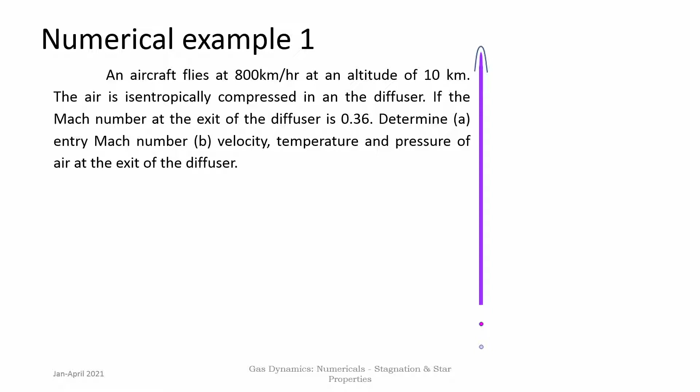The first example here is an aircraft flies at 800 kilometer per hour at an altitude of 10 kilometers. The air is isentropically compressed in a diffuser. If the Mach number at the exit of the diffuser is 0.36, determine the entry Mach number, velocity, temperature and pressure of the air at the exit of the diffuser.

So, see, this is an example with an engineering device known as the diffuser. So, a diffuser is any device which reduces velocity, and the consequence of that is that pressure and temperature increase, and this we have seen even in our discussions in the isentropic relations, that when it is decelerated, pressure and temperature will increase. So these are present in many devices, and this is a typical example.

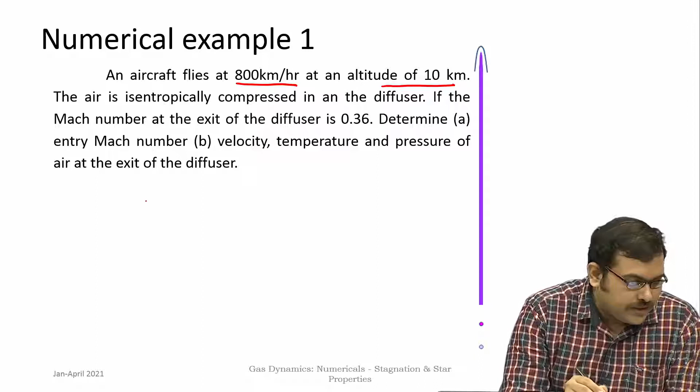So, here the way to begin is you are given the altitude. So, again some concepts that become important here: the flight velocity and altitude are given. So, static conditions and stagnation conditions, the distinction between them. Once you know the altitude, you can reference a standard atmosphere and get the pressure at those altitudes. So, the pressure P infinity is 0.264 bar, and temperature, T infinity, is 223.15 Kelvin. This we can easily find out by using a reference atmosphere.

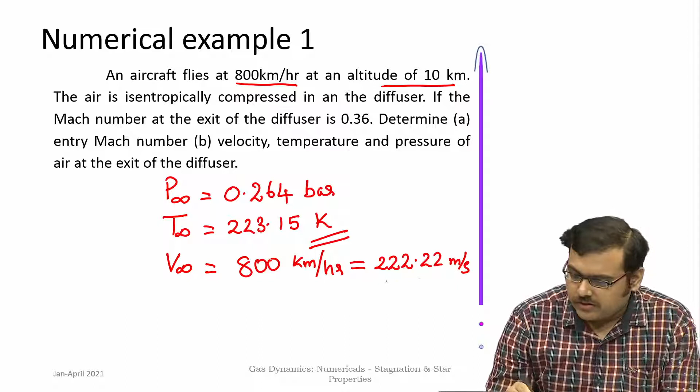Then we are given the velocity of the aircraft. So, aircraft velocity is given, that is V infinity. This is given as 800 kilometer per hour. This can be converted to meter per second, the SI units which are normally used, and this turns out to be 222 meter per second. So one should notice here that the temperature is quite low, and the velocity is significant, so you can expect compressible effects here.

So first thing to do here, as we know in our relations of stagnation conditions and static conditions, everything is dependent on gamma and Mach number. This is air, so gamma is 1.4. So the way to do this is to connect the given quantities to the stagnation quantities, and then from there come to the exit of the diffuser. Since the flow is isentropic, the stagnation pressure and stagnation temperature do not change within the flow. So once this is understood, it is easy to go ahead with the solution of this problem.

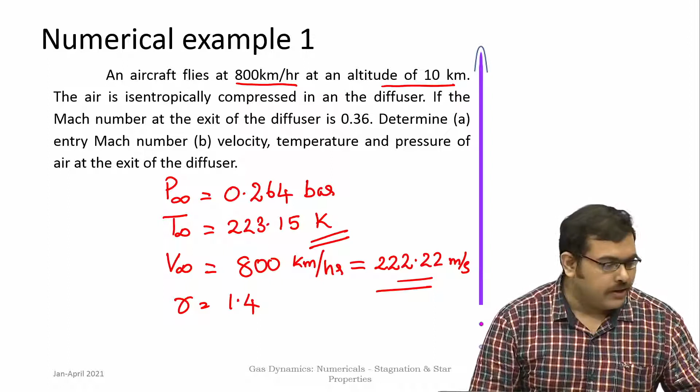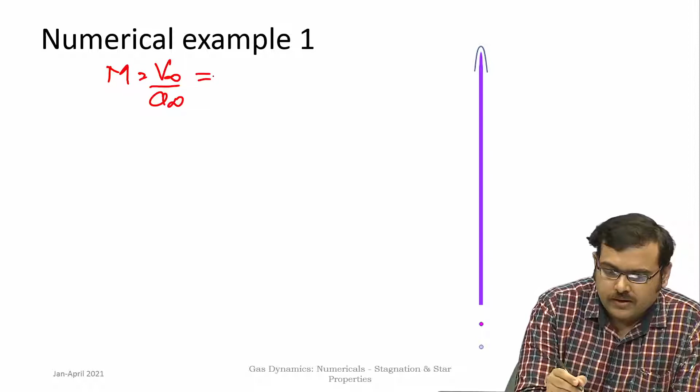So first point is we have to get the Mach number for this flow. So Mach number is V infinity by A infinity, that is the Mach number of the flight. This is 222 divided by square root of gamma RT, with R as 287, and temperature is the static temperature at that condition, so it is 223.15. And this Mach number, if you do the calculation, will come out to be 0.742. So this is known.

Now we have to get the relation for P naught 1 and T naught 1. The idea is at the exit of the diffuser. So the diffuser, for this is a subsonic flow. So you have a diffuser something of this kind, so this is the entry where it is coming in, and conditions are known here.

Mach number is 0.742, P1 and T1 are known, and P2 and T2 should be found when M2 is known to be 0.36. So this is known to you. The flow is isentropic, so P01 and T01 remain constant. So we have to find what is P01 and T01.

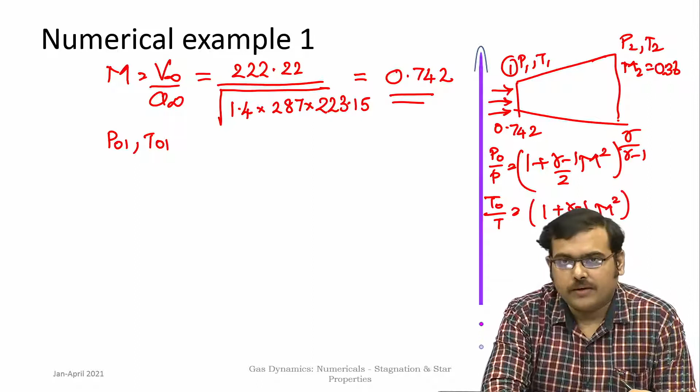This is quite simple, so you can do it over a calculator, or you have tables and charts for this which can be used, or you can also use an online calculator where you can feed in the gamma and Mach number, and usually the results will be in terms of P by P naught and T by T naught for a given gamma and Mach number. So this can be easily found out by various means.

You are free to choose the means, and what you can do then is get P by P naught for this given Mach number. In this case for 0.742, P by P naught turns out to be 0.695. So P naught will be P divided by this value 0.695, and P is already given as 0.264. So this is 0.264 divided by 0.695, which is 0.38 bar.

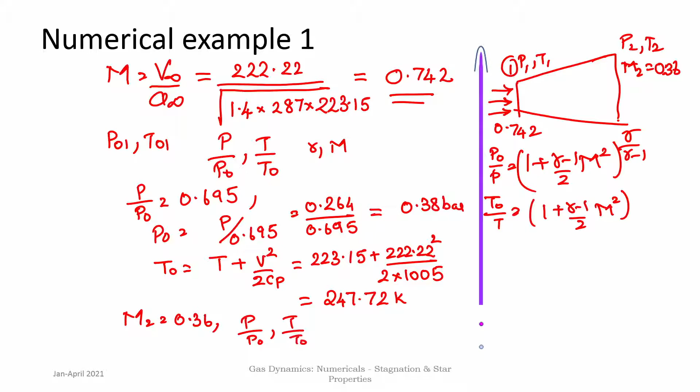So now you know P naught and T naught. Getting to the exit is straightforward. These quantities remain the same. Now the Mach number has changed to M2 equal to 0.36. For this value of M2 one has to find out P by P naught and T by T naught, and then you can multiply. So for M2 equal to 0.36, P by P naught is 0.914, and so P2 is P naught, 0.38, multiplied by 0.914, equal to 0.347 bar.

Similarly, T by T naught is 0.975. So T2 you can get by multiplying by 247.72. This will be 241.53 Kelvin. Now what we need to do is find the velocity, that is V2. We are given Mach number M2, so we can get velocity V2 as M2 multiplied by A2, the speed of sound at that particular point. Speed of sound is a local variable, so you have to calculate the speed of sound at 2.

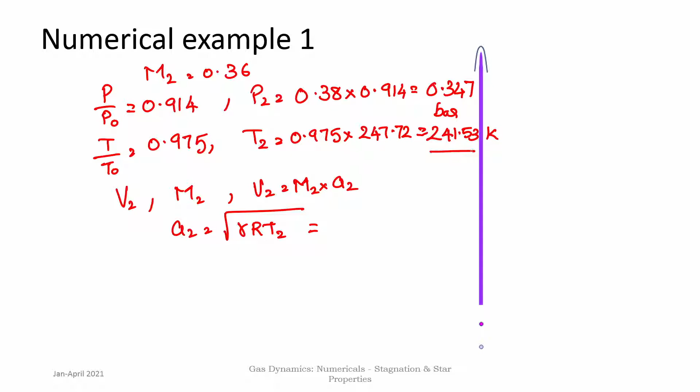This is different from what it was at 1, and A2 is square root of gamma R T2, and T2 you have found out in the previous step, so you can substitute that here, 287 into 241.53, and multiply this by Mach number. So this turns out to be 311.52, and V2 is just 0.36 multiplied by this value, and you get V2 as 112.146 meter per second.

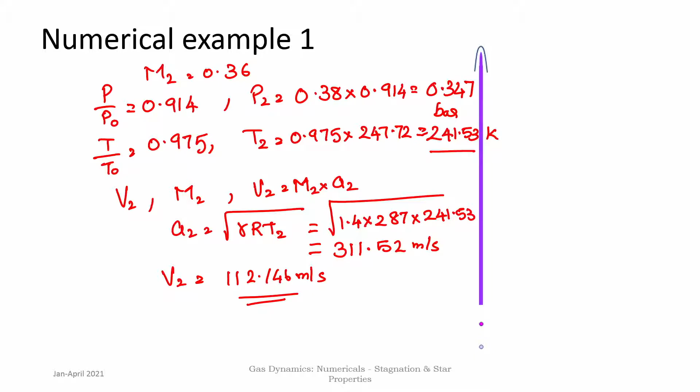So this example showed you how the concepts of stagnation pressure and stagnation temperature can be used to quickly estimate flow properties at different points in the flow path. In this case it was a diffuser with isentropic flow through it. For a first estimate, this is a very good way to calculate these flow properties. Now let us go to the second example.

In the second numerical example, air at 400 Kelvin exits a duct as a jet at sonic velocity. So the temperature of airflow is 400 Kelvin and it is at sonic conditions. At the exit of the duct, Mach number is equal to 1. Gamma and R are given, 1.4 and 287. Now determine velocity of sound at 400 Kelvin, velocity of sound at stagnation conditions, maximum velocity of jet possible, and stagnation enthalpy.

So here the velocity of sound at 400 Kelvin is the same as the velocity of the jet, because you have it at critical conditions, that is V star is equal to A star, at sonic speed. So velocity of sound at the exit is square root of gamma R TE, which is 1.4 into 287 multiplied by the temperature 400 Kelvin, and this turns out to be 400.89 meter per second.

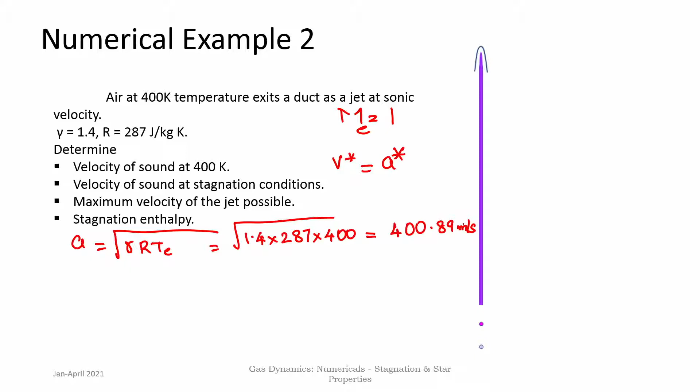Now next is what is the speed of sound at stagnation conditions. Since T naught, the stagnation temperature, is an important parameter, you can calculate the velocity of sound at stagnation temperature, that is the stagnation velocity of sound. From here you can go by various methods; all are equivalent.

One is to use the charts: for this the Mach number is 1, and the relationship between P by P naught and T by T naught at Mach number equal to 1 is known, and then you can find out what is T naught, and from there get A naught.

But another straightforward method is directly using the alternate form of the energy equation, which is A square by gamma minus 1 plus V square by 2 is equal to A naught square by gamma minus 1. Here for stagnation conditions the velocity is 0. So here both V and A are known because they are the same.

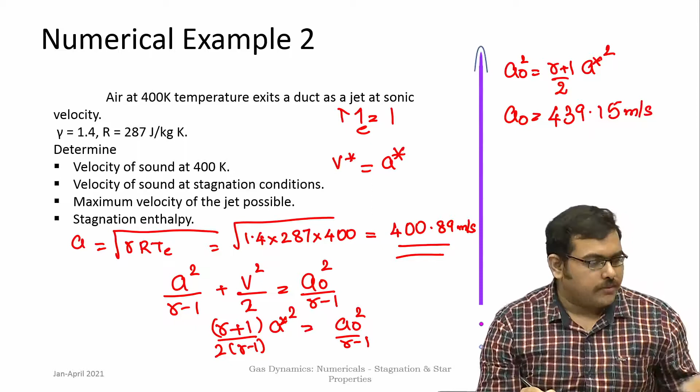So this turns out to be A star square by 2 plus A star square by gamma minus 1 is equal to A naught square by gamma minus 1, or from this you can write immediately that A naught square is gamma plus 1 by 2 A star square. This gives you directly A naught, because A star is already known. So A naught turns out to be 439.15 meters per second.

Then the next question is, what is the maximum velocity of the jet possible? Here also we can use the energy equation. If you look at the energy equation for an adiabatic flow, h1 plus V1 square by 2 equals h2 plus V2 square by 2, you can see that any change in velocity involves interaction between the enthalpy and kinetic energy. So it is a balance between the enthalpy and kinetic energy.

What is the maximum velocity that is possible? The answer is simply that if all the enthalpy gets converted only to kinetic energy, then that yields the maximum velocity that can be extracted from the flow, that is V max. That is the concept here.

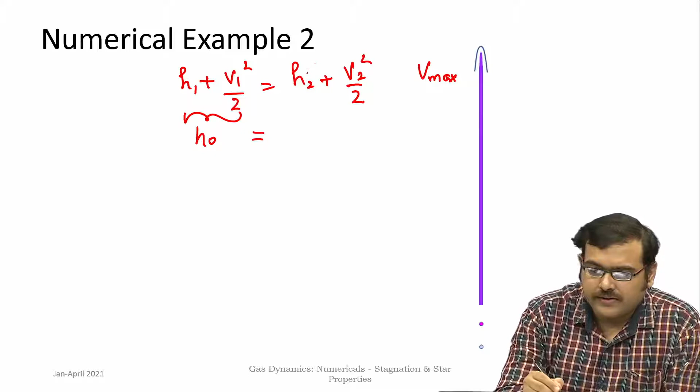It's the other way around: if you take the flow to 0 velocity, then all kinetic energy gets converted to flow enthalpy. So that is the stagnation enthalpy. So this is stagnation enthalpy H naught, and in the second case the enthalpy goes to 0, so this goes to V max square by 2. This is the maximum enthalpy that can be taken in.

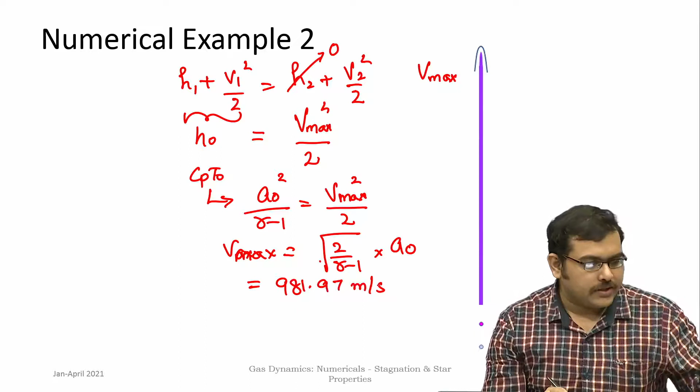Since H naught can be expressed as Cp T naught, it can be expressed as A naught square by gamma minus 1 equals V max square by 2, and A naught is already determined in the previous calculation. So V max is square root of 2 by gamma minus 1 multiplied by A naught, and this turns out to be 981.97 meters per second. So this is the concept of maximum velocity.

Finally we have to determine the stagnation enthalpy, H naught. It is Cp T plus V square by 2. Here temperature is T star, velocity is A star. This is already known and calculated.

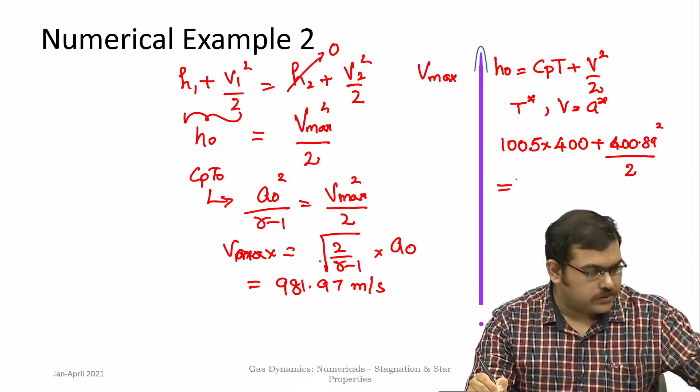So this comes out to be 1005 multiplied by 400 Kelvin, plus V star, which is 400.89, squared by 2, and this results in 482.35 kilojoules per kg. So we have determined the various quantities.

So a new concept that came about in this numerical is that of maximum velocity through an isentropic process, and this is determined when all the total enthalpy gets converted only to kinetic energy.

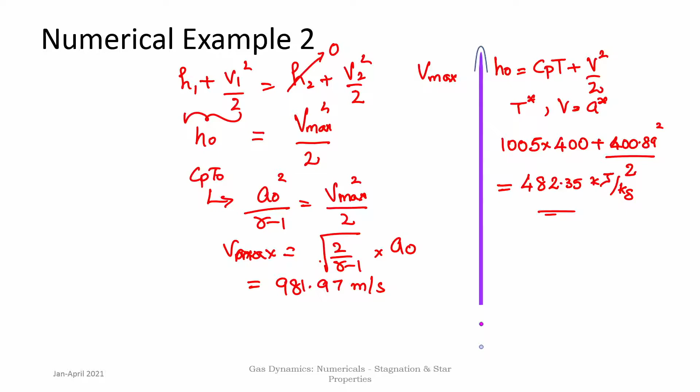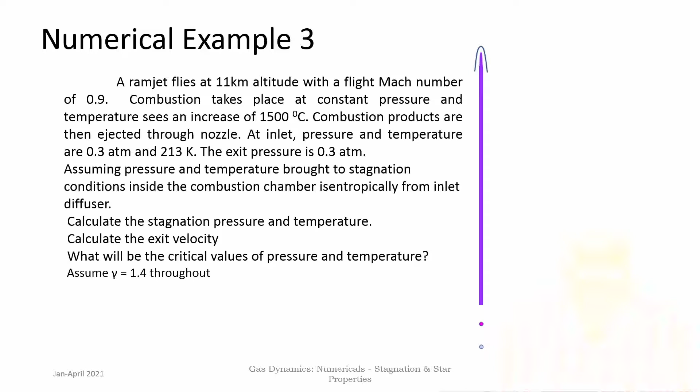Another example, for a particular device, is example 3. A ramjet flies at 11 kilometer altitude with a flight Mach number of 0.9. Combustion takes place at constant pressure and temperature sees an increase of 1500 degrees centigrade. So temperature increases by 1500 degrees centigrade, but during combustion pressure remains constant. Combustion products are then ejected through the nozzle at inlet pressure and temperature.

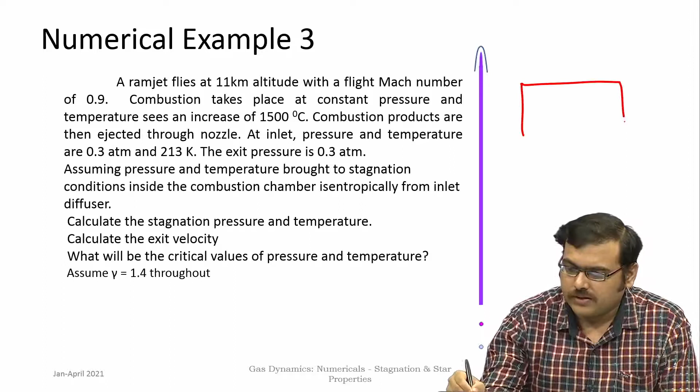...are 0.3 atmospheres and 213 Kelvin. So, inlet pressure and temperature is given, exit pressure is 0.3 atmospheres, that is also given. So, let us take it as a box, and what is given at the inlet: pressure is given 0.3 atmospheres, and temperature is given 213 Kelvin, and at the outlet, this is 1, 2, at the outlet you are given exit pressure is 0.3 atmospheres, and here you are given pressure is constant,

while temperature increases by 1500 degree centigrade, it is the same as Kelvin. So, 1500 Kelvin. Calculate stagnation pressure and temperature, calculate the exit velocity, what will be the critical values of pressure and temperature. So, here assumption is that pressure and temperature are brought to stagnation conditions inside the combustion chamber isentropically from the diffuser. So, the diffuser, again it is an isentropic diffuser, flight Mach number is given 0.9, and it is converting it isentropically to the combustion chamber conditions, and there pressure is constant.

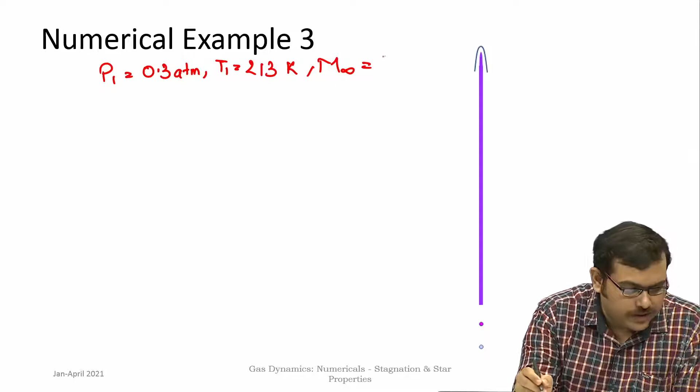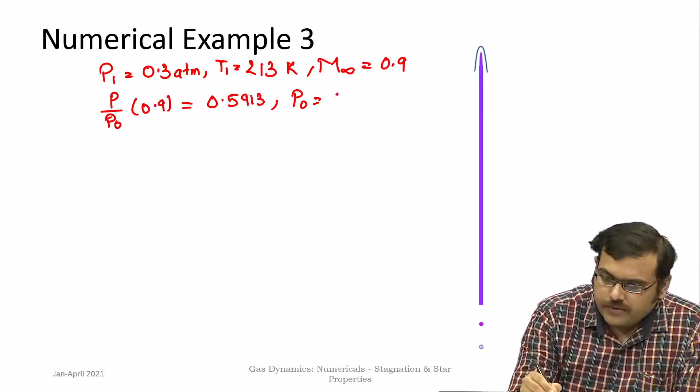So, let us solve this. You are given P1, that is inlet pressure is 0.3 atmosphere, and T1 is also given, 213 Kelvin, yes, 213 Kelvin. And Mach number of the flight is 0.9. So, now directly use the relations P by P naught for Mach number of 0.9. If you get this, this value is 0.5913. So, from this P naught is calculated, it is 0.507 atmospheres.

Next is what about temperature, T by T naught. So, here T by T naught at 0.9 is given 0.8606. So, T naught goes to 247.5 Kelvin. So, what is given? It is given that the increase in temperature is 1500 Kelvin.

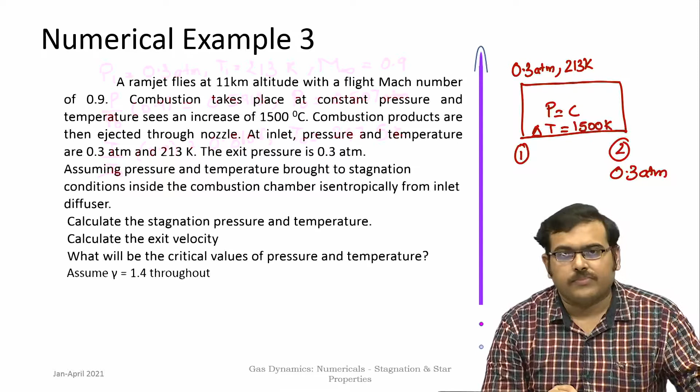Now, diffuser decreases the velocities to very low values. So, unless otherwise stated, since it is not really stated, what is assumed here is that the diffuser brings down the velocities to low values inside the combustion chamber. So, if it is low values, then its pressure and temperature is almost same as that of the stagnation pressure and temperature. This is something we refer to as the reservoir conditions. When velocity is very low, its pressures and temperatures are very close to the stagnation pressure and temperature. So, we can use that assumption here and find out what is the final temperature.

So, T final, that is T exit or T naught exit, because it is the total temperature. So, you are adding 247.5 plus 1500, this is 1747.5 Kelvin, and now the final temperature is known, and pressure remains constant here at 0.507 atmospheres. Now at the exit the pressure is given as 0.3 atmosphere. So this is a very special case of very ideal kind of analysis. In real analysis there will be other irreversibilities that come into picture.

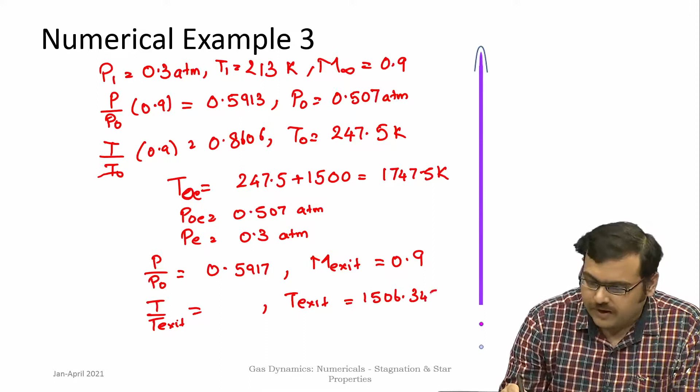The T by T exit, that is T by T naught, for 0.9 we already know this, we had done it already, and from there you can calculate what is T exit, which turns out to be 1506.345 Kelvin,

and from here you can calculate the V exit by using either the condition that relates T naught, that is H naught is equal to H plus V square by 2, or the other way is to find out the speed of sound for this particular static temperature, and then find out velocity. So then V exit will become 696.21 meter per second.

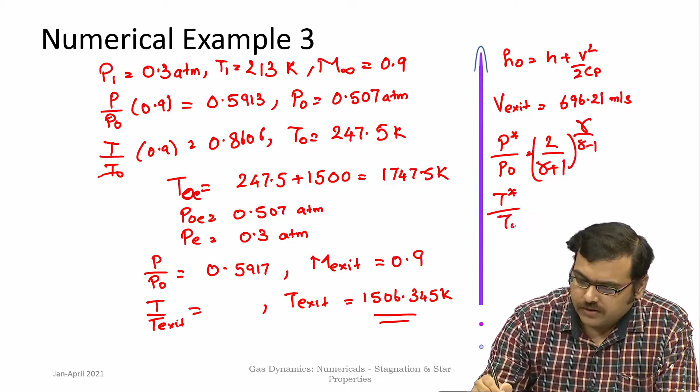Now to find out critical conditions, what are the critical conditions? So you can directly use the relation between P star and P naught, which is 2 by gamma plus 1 to the power gamma by gamma minus 1. Similarly T star by T naught is 2 by gamma plus 1. And T naught and P naught are known. So this turns out to be 0.2678 bar, and here this turns out to be 1456.25 Kelvin.

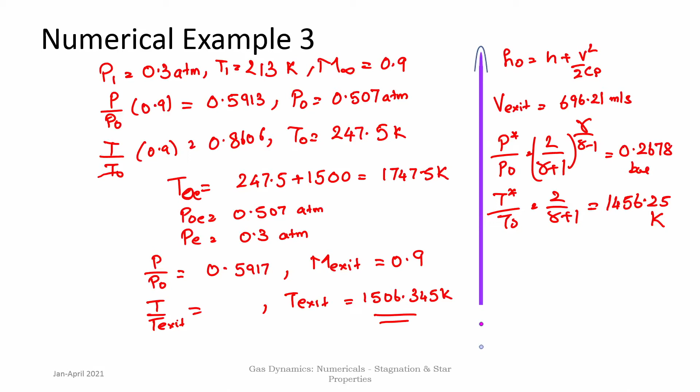So I think with these three numerical examples we have a clarity on the understanding of stagnation properties and star properties. So with this understanding we will move on to normal shocks, where these concepts will be used extensively to analyze the normal shock itself. So that we will start from the next class.